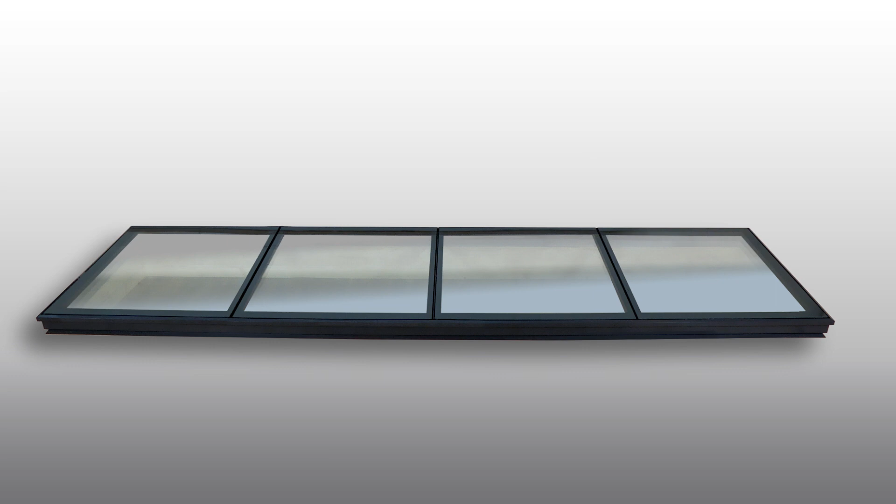I'm here to show you how to correctly install your flat modular roof light. But if you have any queries or concerns, you can contact our technical department at any time for any advice or assistance. The first point to remember is that all our flat roof lights are triple glazed as standard.

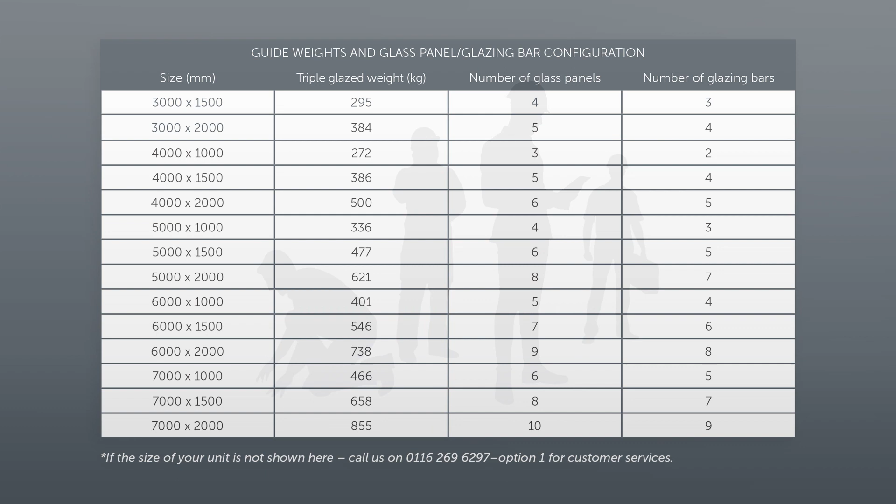This means that a single panel can weigh as much as 70 kilograms, which is why we recommend a team of 4 people for the safe installation of a roof light. Check the table that comes with your kit for the approximate weight and glazing splits, so you're familiar with the task at hand. In addition to your flat modular roof light kit, you will also need silicone adhesive sealant.

We recommend Dow Corning 791 or similar, a drill with a high-speed steel drill bit, a posi drive, glazing packers for the accurate positioning of glass panels throughout the installation, handheld glass suction pads, a minimum of 2 double pads or 4 single pads with a combined lifting capability of 100 kilos, 50mm timber screws, masking tape,

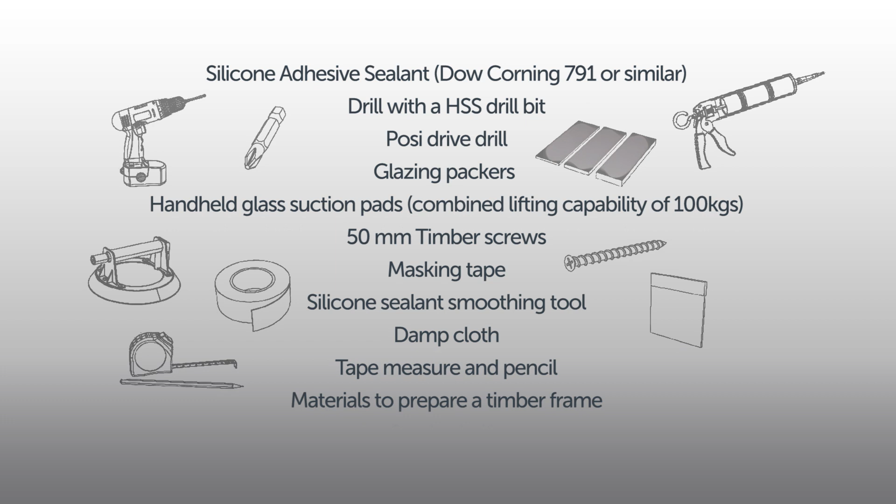a silicone sealant smoothing tool, a damp cloth to wipe off any excess silicone as required, a tape measure and a pencil, materials to prepare a timber frame, and finally a Stanley knife. Please make sure you have all the components on the checklist attached to the side of the box. If there's anything missing, please give us a call.

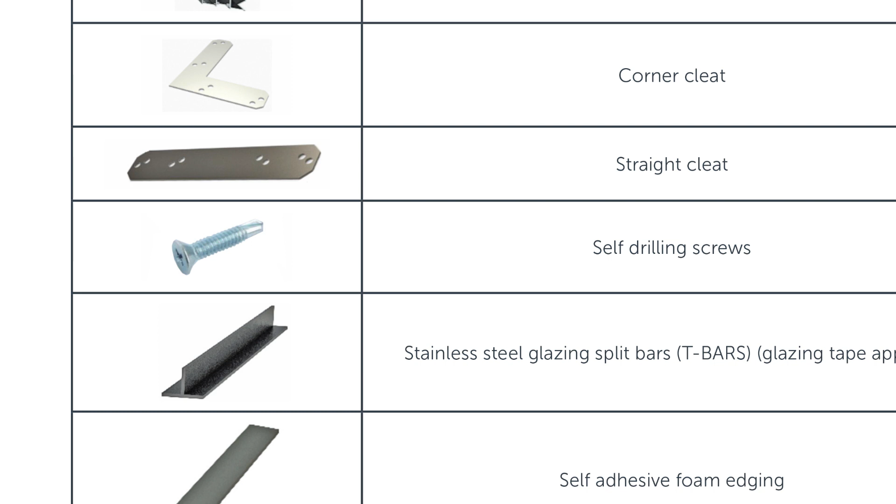Before you begin construction on your new flat roof light, you need to ensure that there's a timber curb created around the opening aperture. This curb needs to match the internal dimensions of the roof light. In this case, the roof light would be 4 meters by 2 meters, so your aperture needs to match up to that.

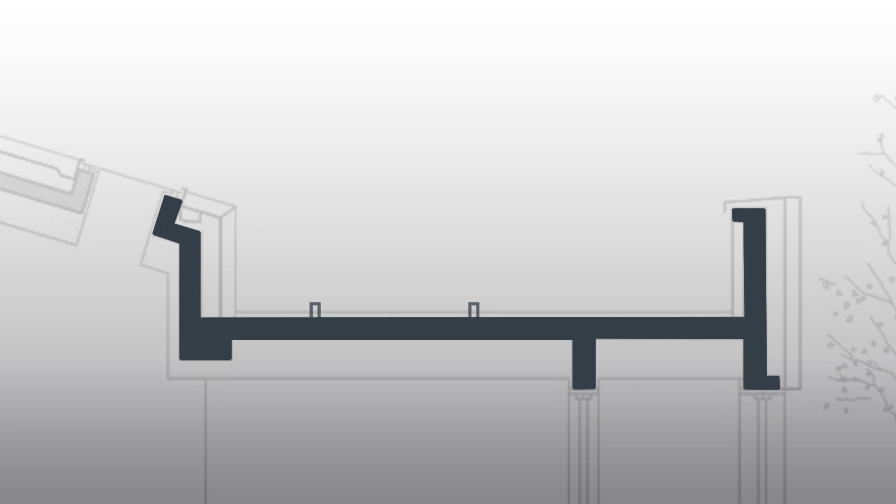When installing the timber curb, make sure that the inside of the curb is flush with the inside of the aperture. The curb should measure 75 millimeters in width to match the width of the built-in upstand that you're going to assemble. We also recommend a minimum curb height of 25 millimeters from roof level, but you can go higher if you need to.

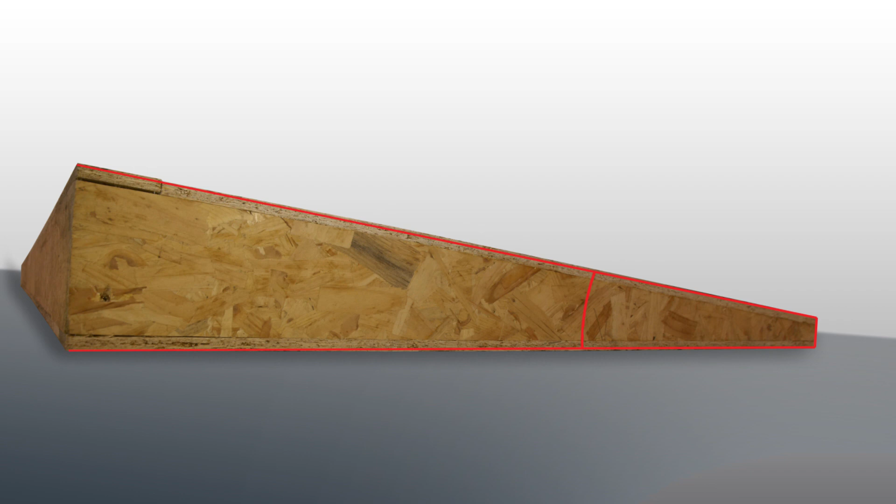Finally, if your roof doesn't already have a pitch between 5 and 15 degrees, you'd need to ensure that this has been created in your upstand to allow easy water runoff. In regards to the roofing membrane, we advise you apply this after the installation of the roof light to prevent you puncturing or damaging this while you're working.

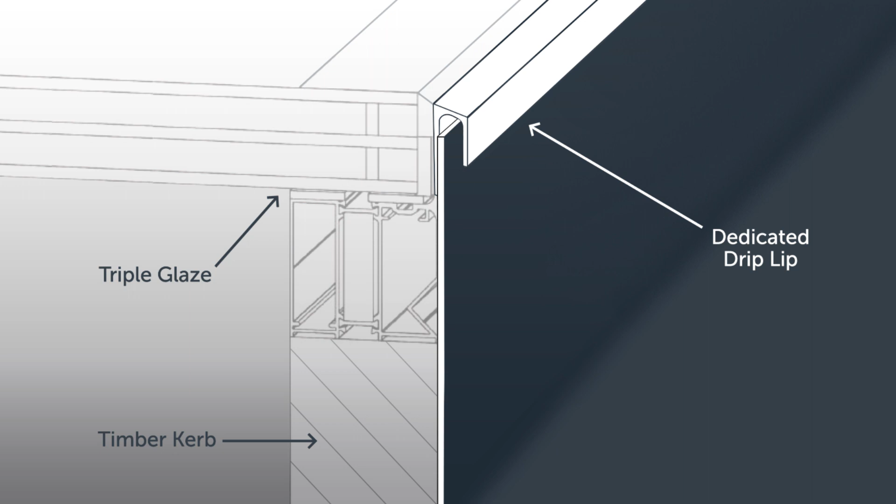However, if this is done prior to the installation, please ensure that you have enough material to run up the upstand underneath the integrated drip lip. You can just fold this up and tuck it neatly out of the way while you're working. The upstand will come ready for assembly. The number of pieces will depend on the size of the roof light you have ordered.

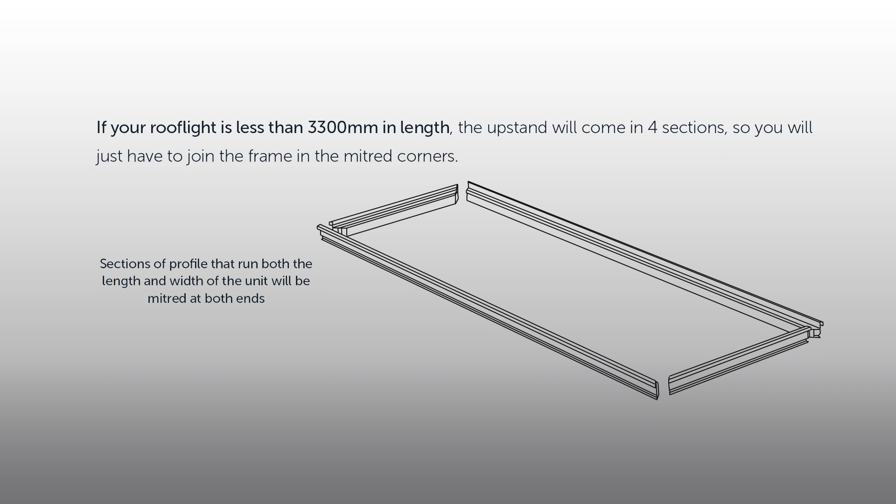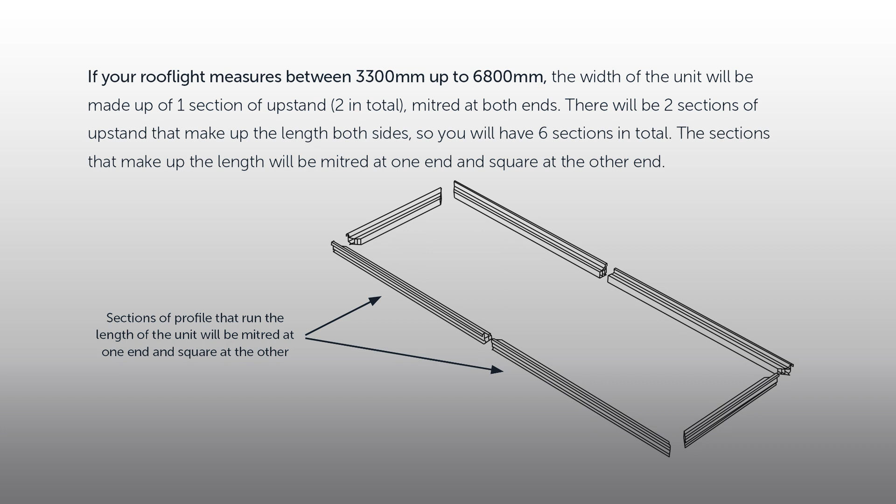If your roof light is less than 3.3 meters in length, the upstand will come in 4 sections, so you will just have to join the frame in the mitered corners. For roof lights from 3.3 to 6.8 meters, you'll have 6 sections in total, the 2 ends and 4 pieces for the lengths, which you'll need to join together.

And finally, for roof lights between 6.8 and 10.3 meters, you'll have a total of 8 pieces. The 2 ends and the lengths are split into 3 parts each. In this video, we will be featuring a unit that's 4 by 2 meters. So there will only be 6 pieces for you to assemble.

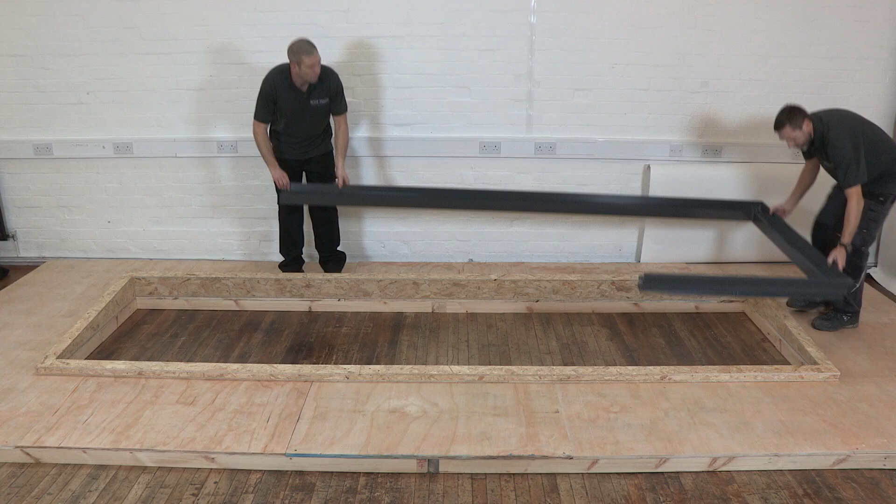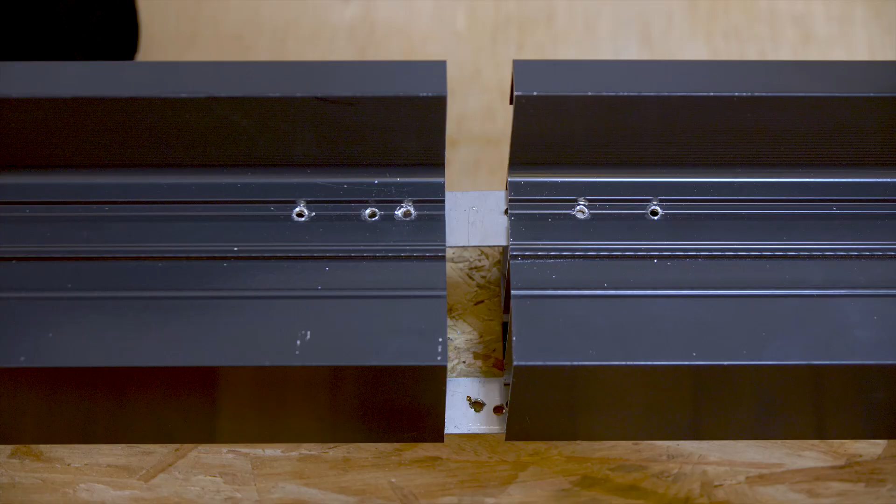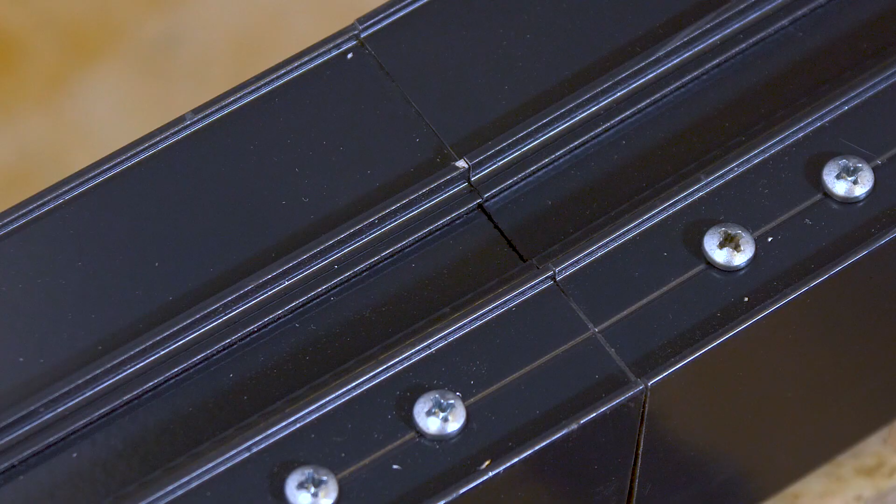Start by ensuring your pieces are laid the right way up around your curb, the corners are mitered and the joins are squared off. Slot the supplied cleats into the frame as shown and push the pieces together like this. Then locate the pre-formed holes on the top of the upstand. Slot screws in temporarily to stop the frame coming apart as you work.

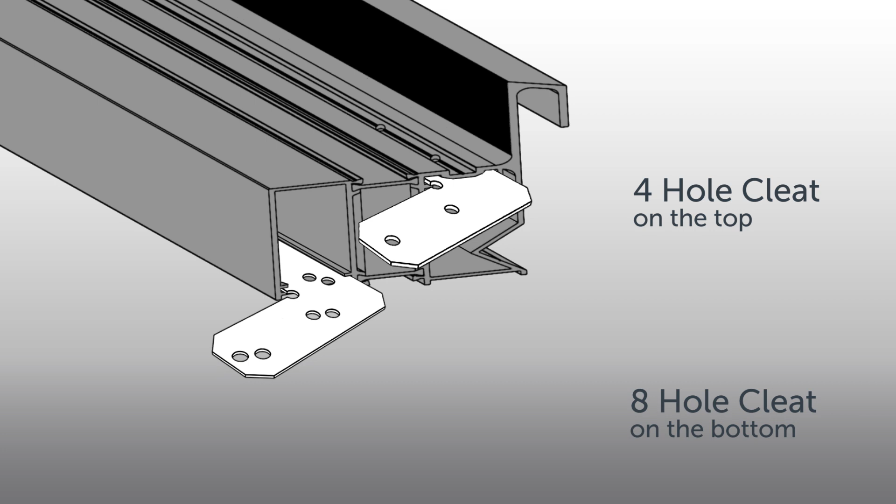Add a touch of silicone and wipe away any excess using the damp cloth. That's the sides done. Now let's move on to the corners. Take the 2 corner cleats and insert them into one of the mitered corners. Add some silicone along the edges and screw the 2 pieces together with 4 screws. Wipe off any excess silicone and repeat for the other 3 corners.

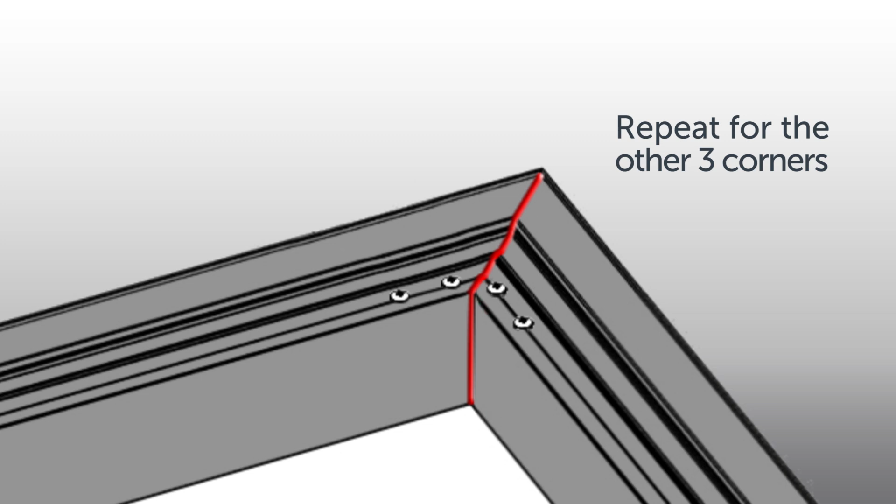When all of your sections are joined, carefully turn the upstand over so the underside is facing upwards. Locate the 4 pre-formed holes at each join and screw them together. Put a spot of silicone into the drip lip at all points where the sections of the upstand meet, and a bead on the inside angle of the join of the corners. Wipe off any excess and turn the upstand back the right way up and move it to one side.

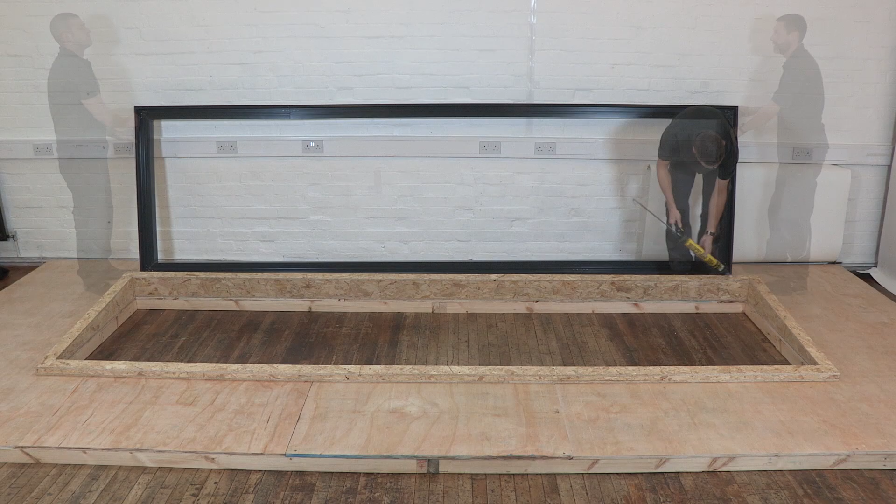Now you're ready to fix the upstand to the timber curb. Apply a thick bead of silicone all the way around the timber curb, about 20 mil from the outside edge. Then carefully place the assembled upstand onto the curb so that it sits flush on top. You now need to secure the upstand to the timber curb.

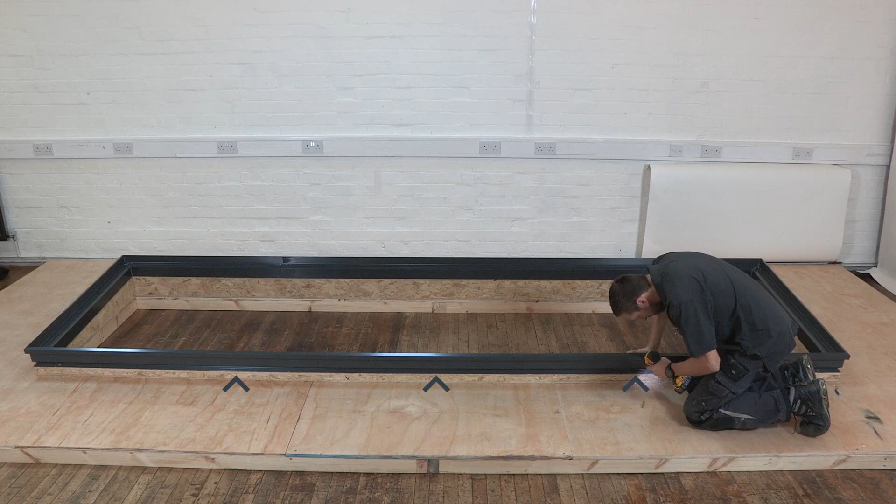First, you'll need to pre-drill your holes into the aluminium frame, approximately 100 mm from each corner. Screw through the upstand into the timber underneath. We recommend you also fix across the width of the roof light, both in the center and at roughly 1 meter intervals along the length. The final stage in the preparation of the upstand is to take the roll of sticky back foam edging provided in the kit and apply it to both sides of the upstand as shown.

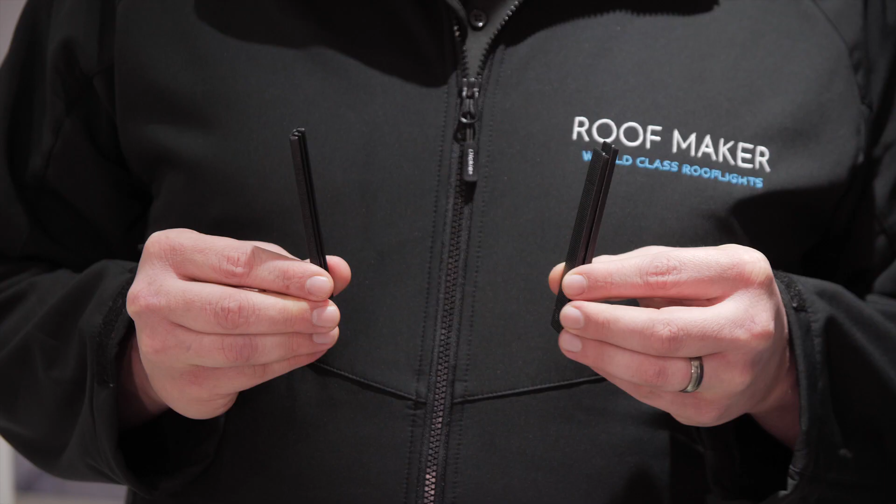Moving on to the glazing panels, there are two important points to remember. Firstly, the even spacing between each glazing panel. Not only will this give a great appearance to the roof light, but will ensure a good waterproof seal. We've come up with an easy way to do this using our glazing packers. These are exactly 5 mm deep, so combining 3 together like this and slotting them into the gap along the end, you know you're pretty much spot on.

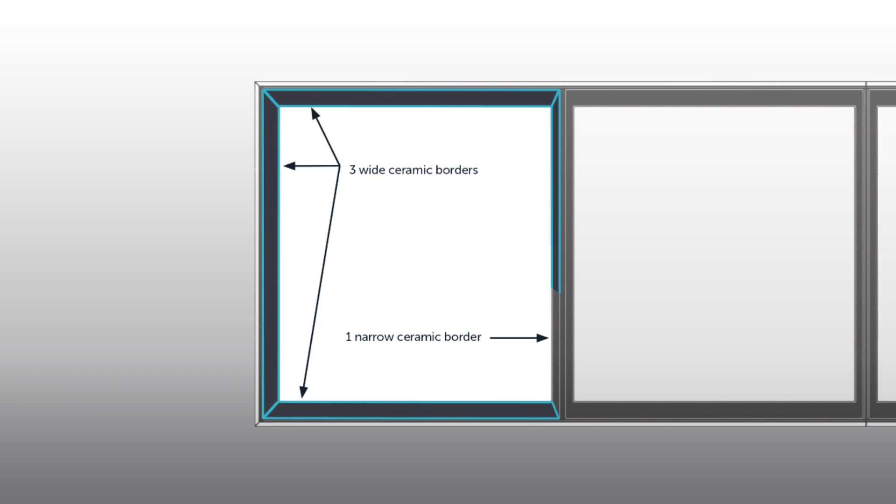The second is to make sure you use the correct panel in the corresponding position in the roof light. There are two different types of panel, one with 3 thick painted ceramic borders and a single thin painted ceramic edge, and one with 2 thick painted ceramic borders and 2 thin ones.

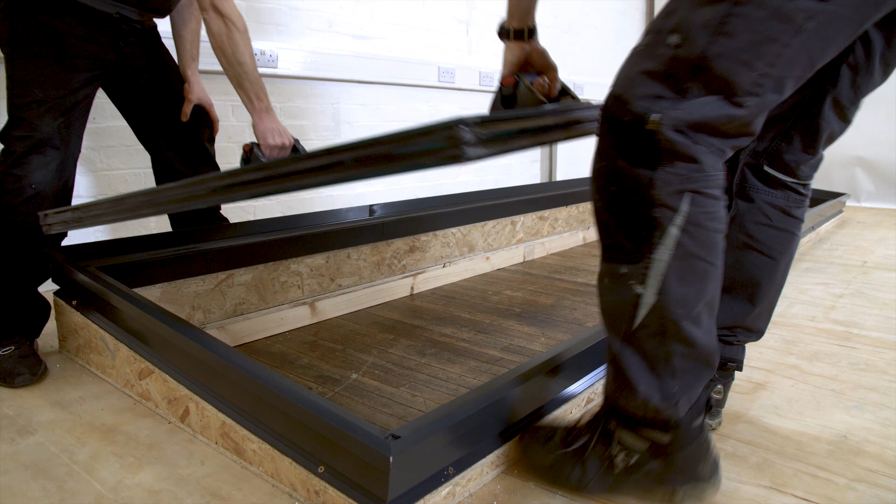Now you're ready to take the first panel with 3 wide ceramic edges and position it inside the upstand so that the edge with the thinner ceramic edge is facing inwards. Next, insert your 3 packers as already mentioned between the edge of the panel and the upstand. This will give you the correct spacing.

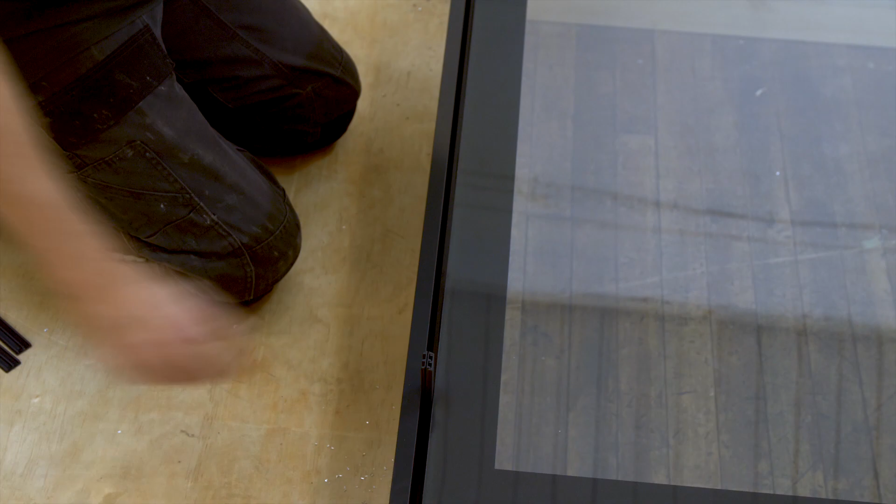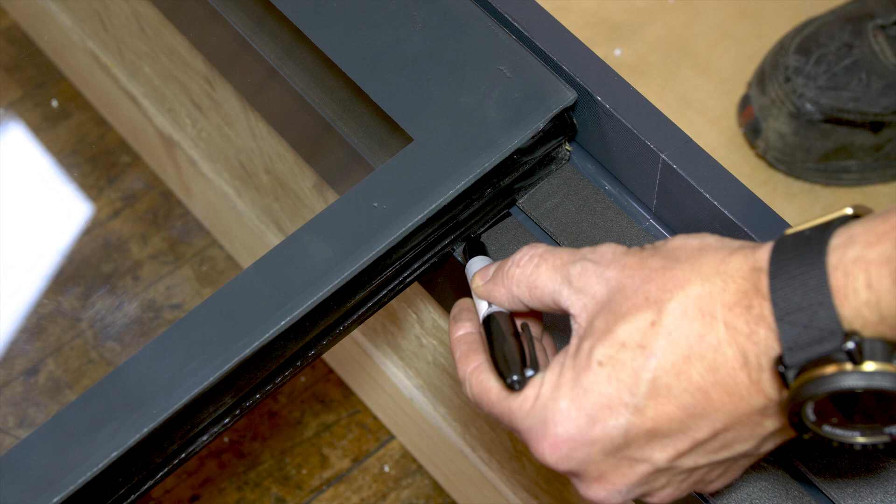You are now ready to position the first T-bar. But first you need to measure exactly where it's going to sit on the upstand. Mark the inside rows of foam edging on both sides of the upstand where the edge of the panel sits. Lift out the glass and make a second mark 35 mm either side of the ones you've already made.

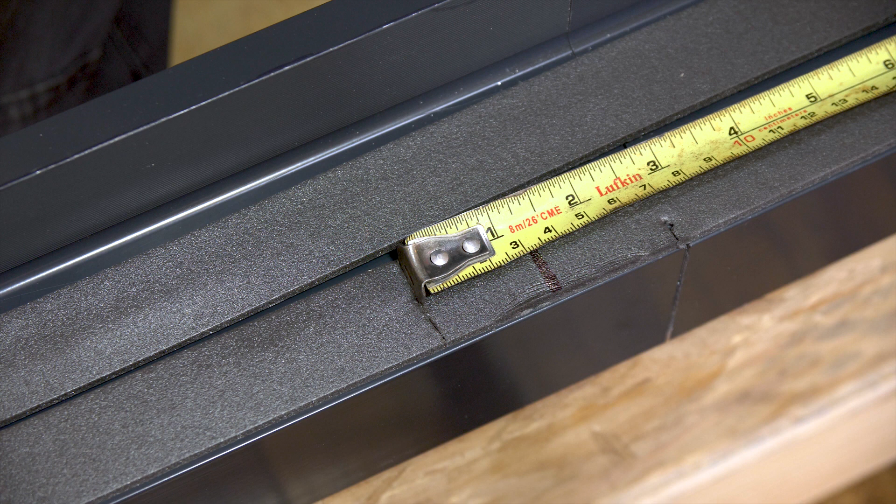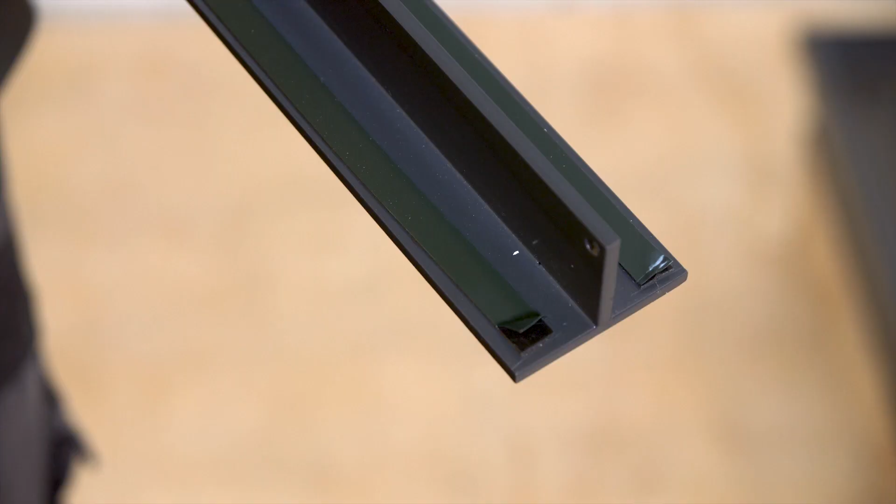The T-bars come pre-prepared with glazing tape, but before you position it, you need to remove the first 5 centimeters of the protective covering from both sides at the ends of the bar. Fold it to the back of the T-bar. This will give you something to hold onto once you're finished and need to remove the tape from the inside of the roof light. Don't remove all the tape, otherwise you won't be able to reposition the T-bar.

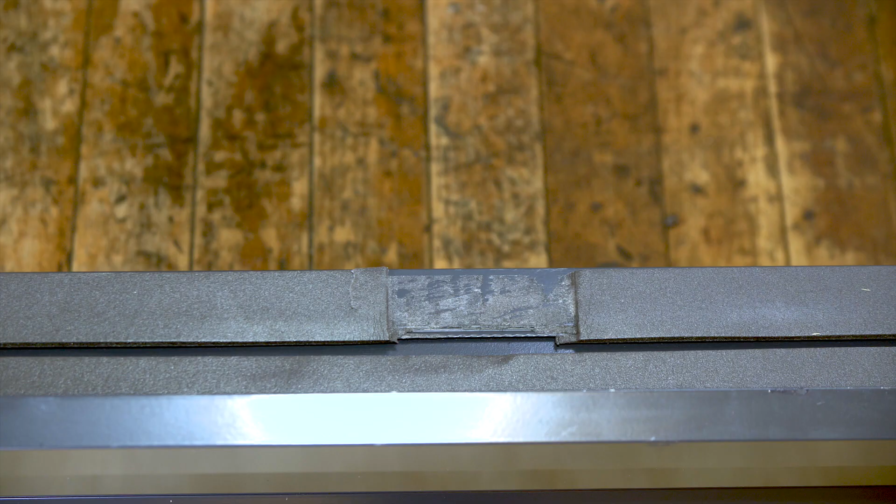Carefully locate the T-bar into the gap you've cut in the foam, and then reposition the glass pane on top. Don't forget to use the packers to ensure even spacing between the pane and the upstand. Use 2 more single packers to create a 5 mm gap between the inside edge of the pane and the spine of the T-bar.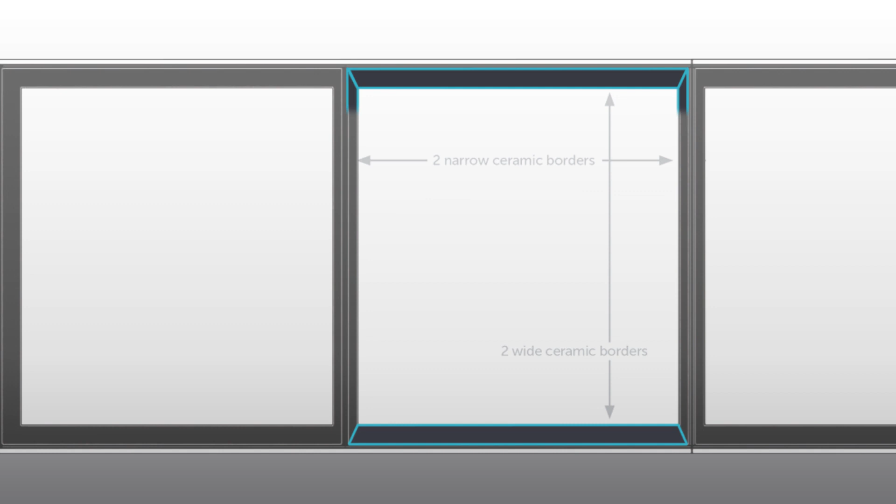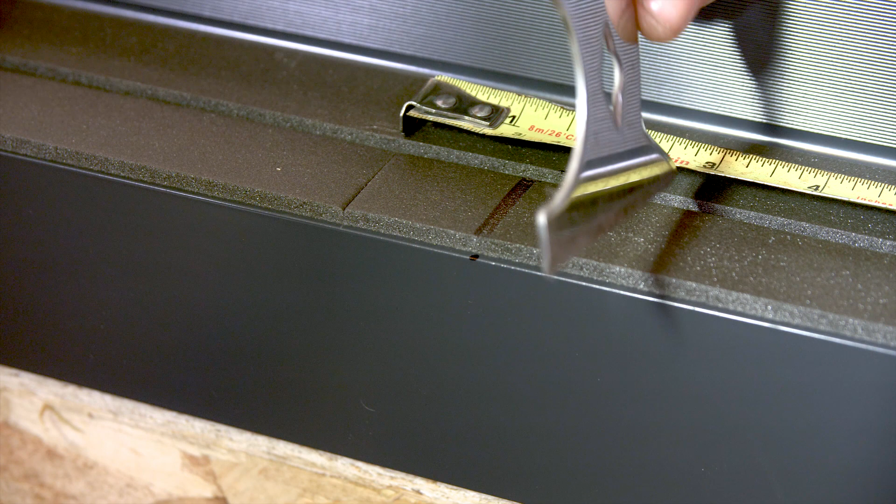The second panel of glass that you will place into the frame will have a wide ceramic border on 2 sides. The wide borders go on the top and bottom, and the narrow borders adjoining the other panels. Use 2 more single packers to create a 5 mm gap from the T-bar, and use bundles of 3 packers to space the second panel from the edges, just like you did previously. Mark the inside row of foam as you did before, lift out the panel and create another 70 mm wide cut in the foam.

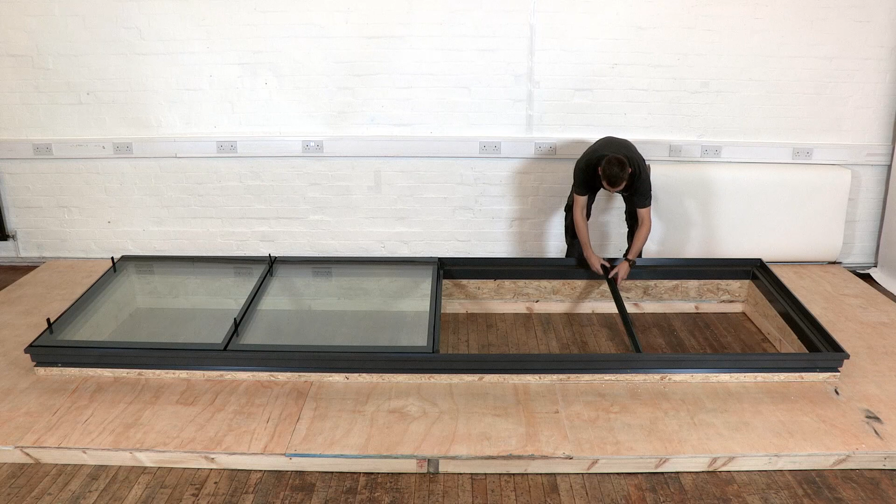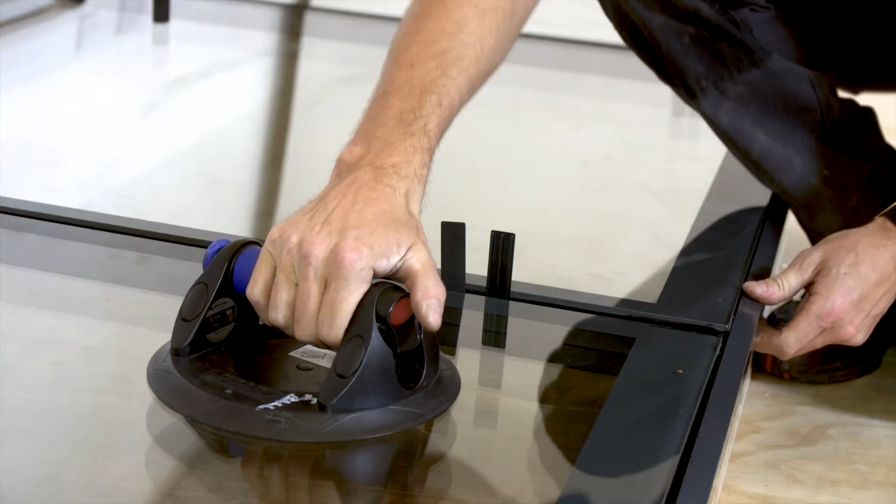Repeat this process for each panel until you're ready to do the last one. Offer up the panel to its intended slot and check 2 things before you proceed. Firstly, will it fit in? If it won't, you need to narrow the gap between the other panels as shown. Secondly, if you have more than 15 mm gap between the end of the upstand and the panel, you'll need to widen the gap between the other panes. If you don't, you'll risk the weather penetrating the roof light.

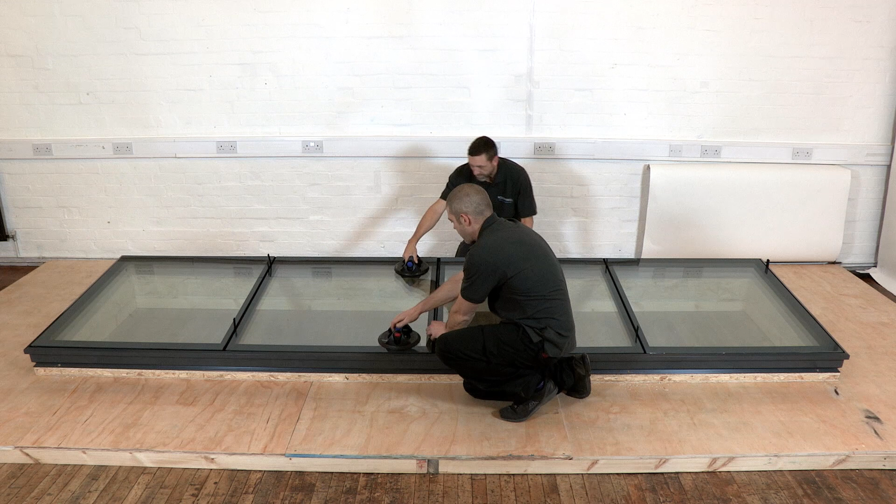Try and keep all the gaps the same as each other, but it is more important that the panes don't touch the central spine of the T-bar. If this is unavoidable, reposition the T-bar slightly to create the required 5 mm gap. Once you are happy all glazing has been set neatly and accurately, you are nearly ready to seal up the unit with the silicone provided.

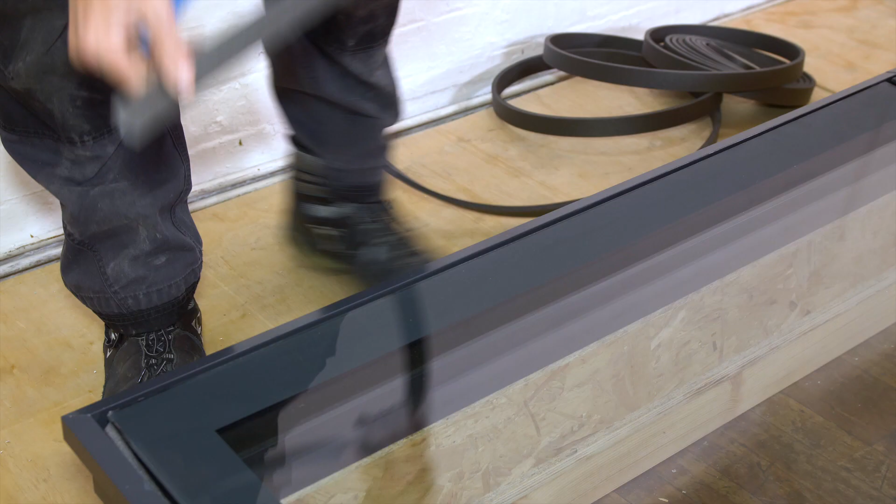Take the roll of foam edging without the sticky backing and push it into the gap between the glass panels and the upstand frame on all 4 sides of the roof light, pushing it down as far as possible. Mask all 4 sides of each panel as shown, leaving approximately 1 mm between the tape and the edge of the glass, so you don't pull any silicone out of the join.

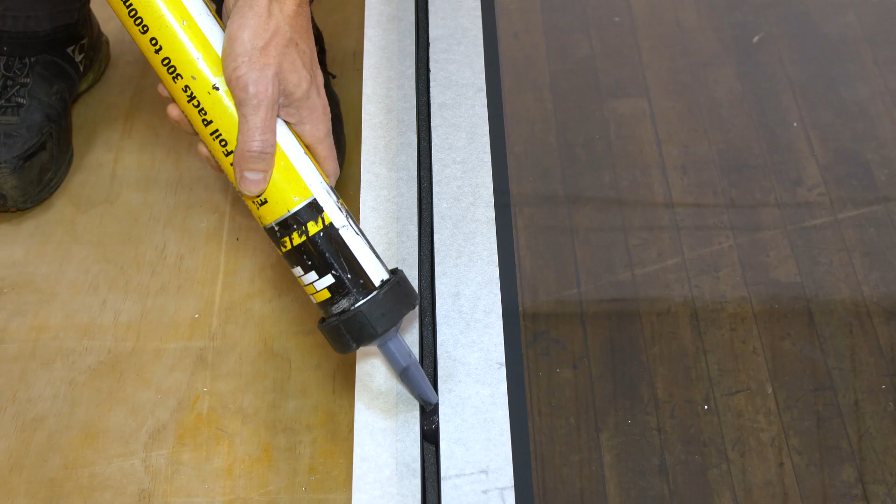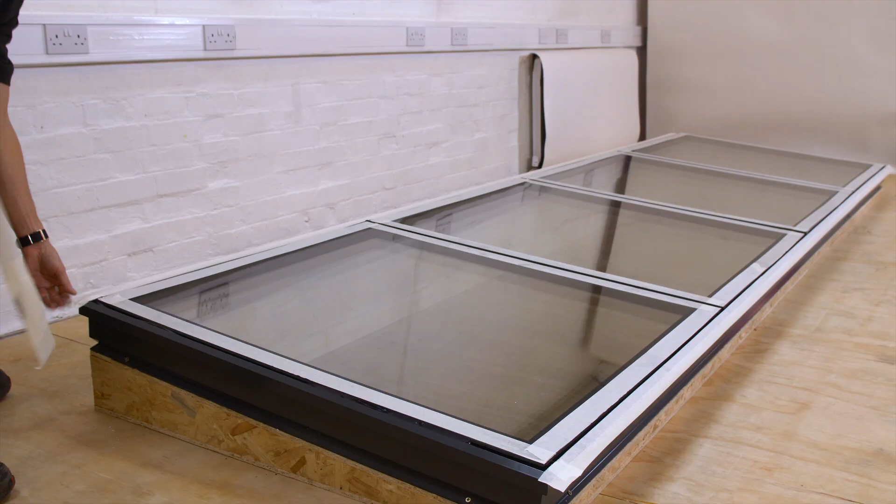Apply a generous amount of silicone into the spaces between your glass panels and the perimeter gap. Use a smoothing tool to create a nice flat finish. Remove the masking tape and double check there are no gaps in the silicone. Wipe away any excess with your damp cloth. From the inside of the roof light, carefully peel away the glazing tape protective covering from the T-bars. There will be 2 strips for each T-bar.

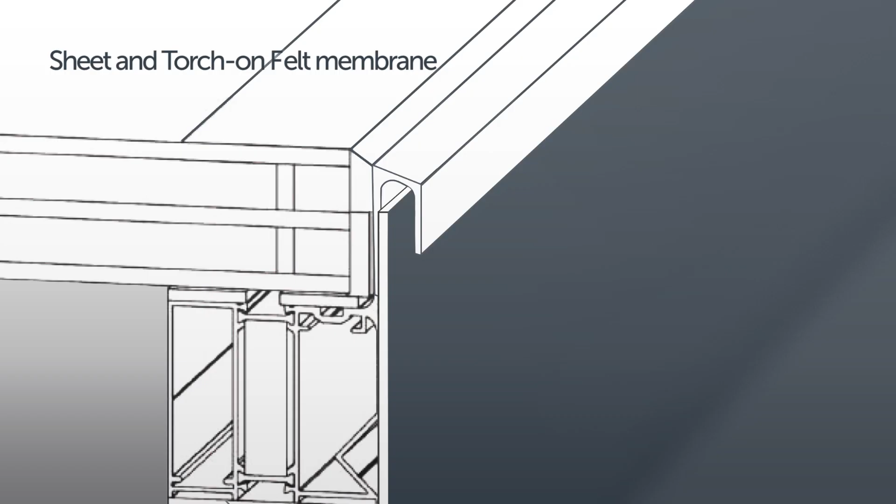Okay, job almost done. You're now ready to flash up your upstand with your chosen roofing membrane. If you're using a sheet membrane, you need to make sure that it's tucked right under the dedicated drip lip that sits just underneath the glass. This is important as it acts as the final weathering stage to avoid water ingress in this area.

If you're using a torch-on felt, you need to cut your membrane to the correct size, fold back and preheat with your heat gun. Only then should you apply it to the side of your unit. This avoids damage to the unit which would be caused if applying heat directly.

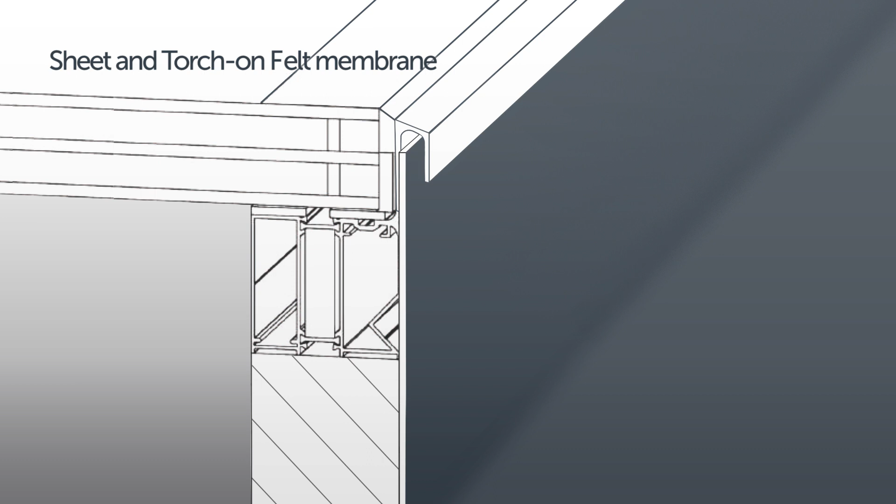If you're using GRP to finish the roof, silicone bond a 4 mm plywood border around the upstand and curb. You can screw this into the timber curb if you wish to make this more secure. What this does is provide a more suitable surface for the GRP to adhere to. Again, ensure that this goes right up underneath the drip lip as the diagram shows. And also, ensure that your GRP membrane finishes underneath the drip lip.

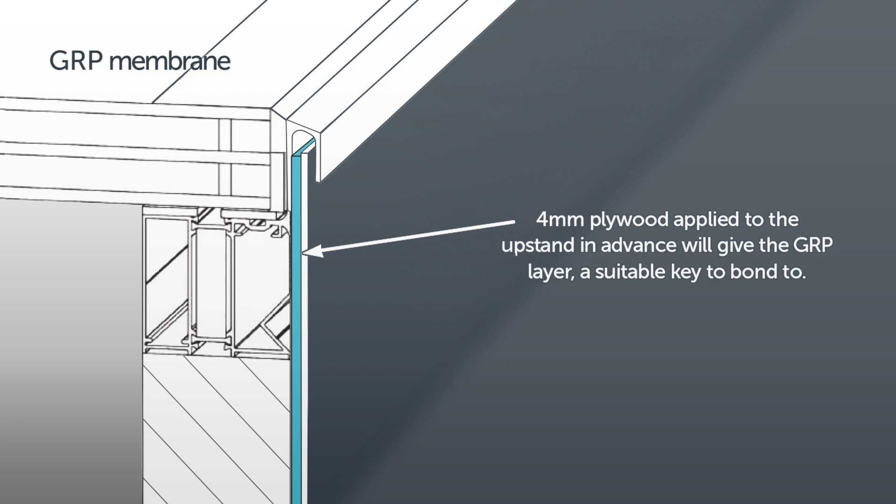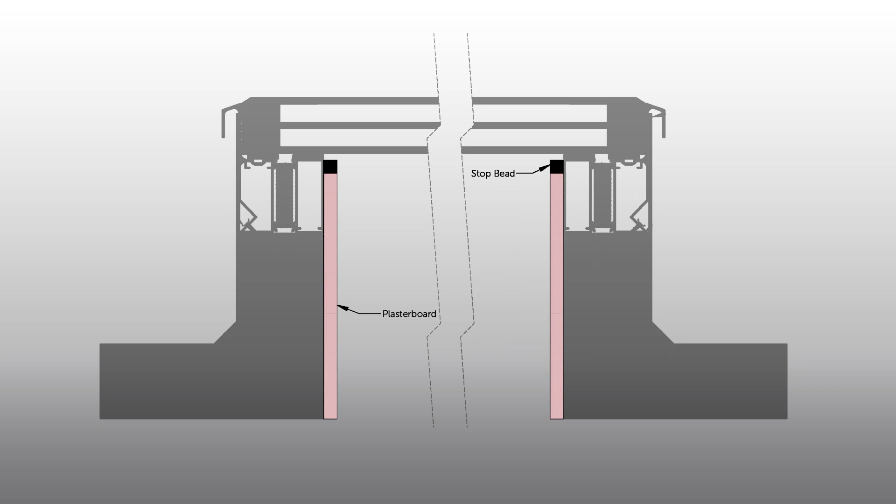Okay, your roof light assembly is now finished. For internal plasterboard finishing details, please refer to our cross-section installation guide. We hope this video has helped to make the installation of your roof light easy and trouble-free.